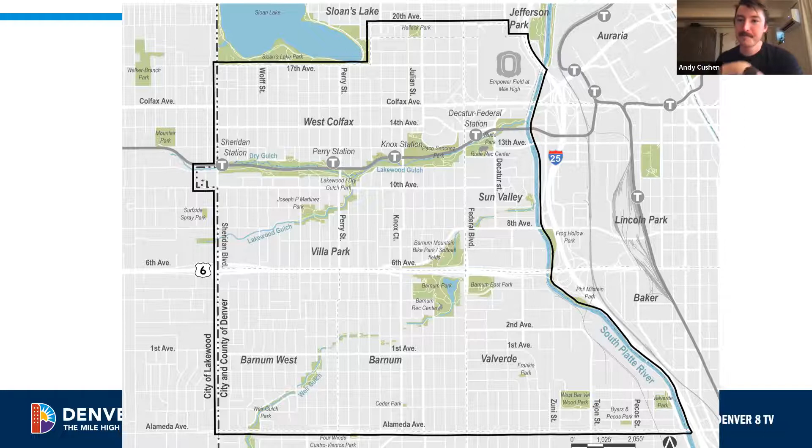Of course, certain projects the city knows that we don't, but is it just easier to put stuff like that in the chat? That's great, sure, yeah definitely. Any neighborhood efforts or things that we maybe aren't on top of, that's fabulous, that would be great.

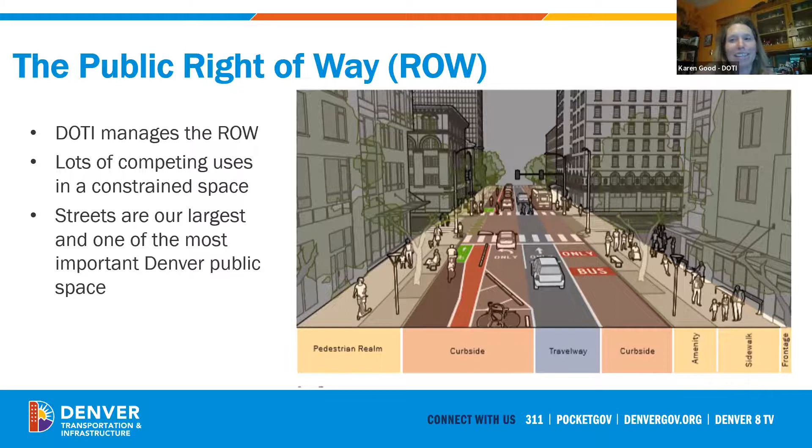I believe our next slide talks a little bit about overall right of way. I'm holding out for the next slide - it talks about how many people are willing and interested in biking but not really comfortable. That's 75% of people who would potentially ride a bike if they felt more comfortable.

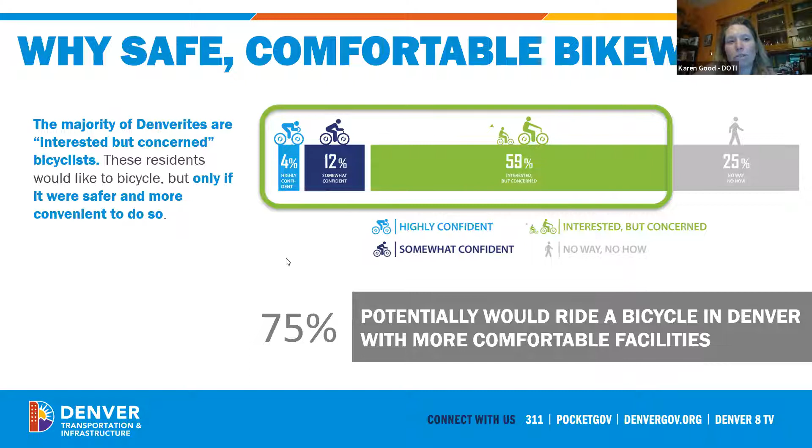Next slide, Beth. We look at opportunities to build on our past planning efforts, including Denver Moves Bikes, Denveright. We're doing all sorts of good things.

One of the ways we try to be efficient in building out our multimodal network is doing some of that build out with existing projects that we have.

The city does a lot of lane miles each summer in paving season, 400 to 500 miles. So we look at our paving map, based on things like condition of pavement. We look at what's planned to be paved in the next year, and identify areas that are part of the existing bike network, then take a deeper dive in seeing what we can do.

Do we replace the facility as is? Can we upgrade the facility? Is there anything else that we need to think about? Next slide.

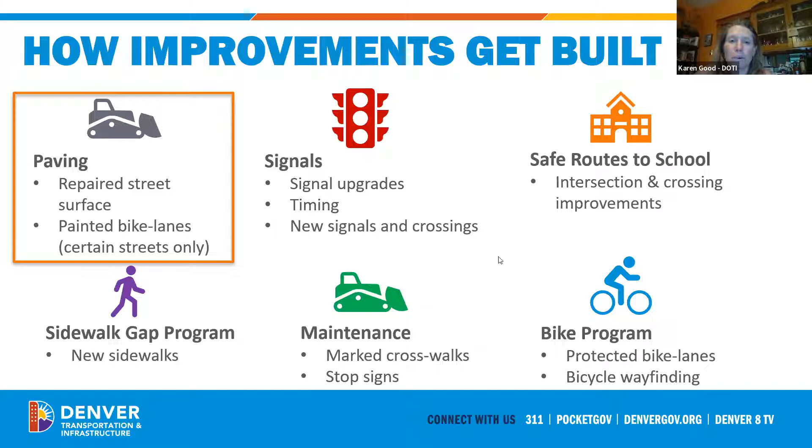We are also looking at other means of doing improvements, from our Safe Routes to School program to our Signal program, et cetera. Next slide.

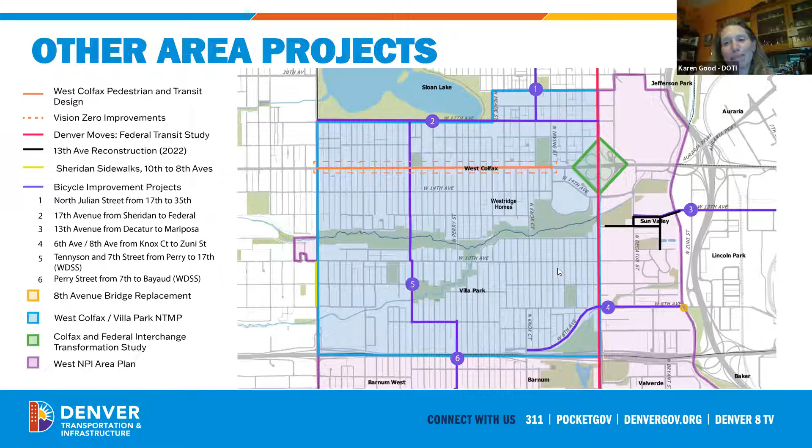We've talked about the other projects in this area. As we mentioned, we changed this from the West Colfax to the West area plan, but you all are pretty up to speed on some of the other projects in the area. We're going to try to zoom through and dive into 17th.

We are really at 100% design. So again, you're going to see some of the existing conditions, which I'm pretty sure you're familiar with. Our project area is from Federal to Sheridan on 17th. We've had lots of one-on-one meetings with folks in our office hours, as well as those pop-ups in the past couple months that I mentioned.

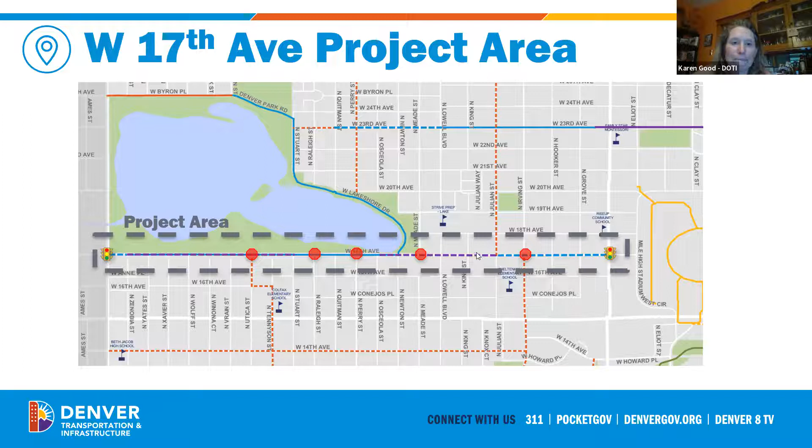So we've got a lot going on. As many of you are aware, as you go down or up 17th, there are really several different cross sections, from the west end that has the existing bike facility to the east end that currently has Sharrows.

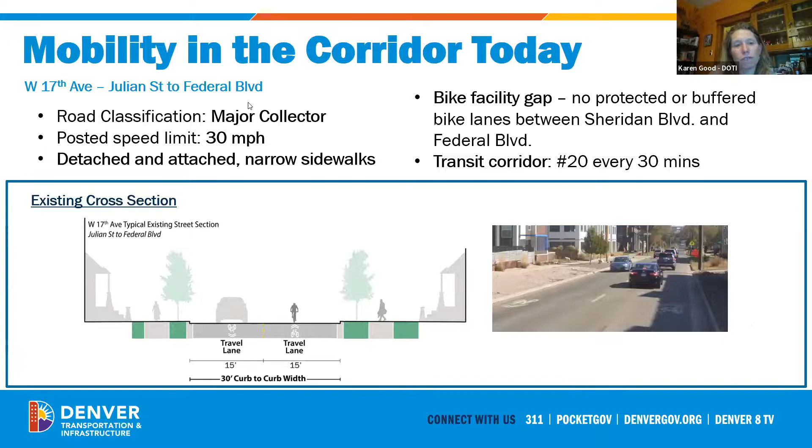So we look at all of that. Going to Julian, that's where we have no protection, we have those Sharrows and parking. And then in the final section, Julian to Federal, we have Sharrows and no parking. So it's a fairly short segment, but 3 different cross sections within that.

And that leads to some different cross sections of what we can do. We're making data-based decisions, so we look at the speeds, the volumes, and the crashes. The big summary is that the west end has higher volumes, the east end has lower volumes, and that speaks to what type of facility we'll have.

I believe we've got a little bit of a description and chart on the next slide. Oh, no, go into the crashes. Sorry, this is all in my head.

So our next slide talks a little bit about parking. As you saw in our different cross sections, some areas have parking on one side of the street, some have no parking, some have parking on both sides. So for making changes to the bike network, that often involves trade-offs with parking, so we wanted to get a good feel for what the parking utilization is.

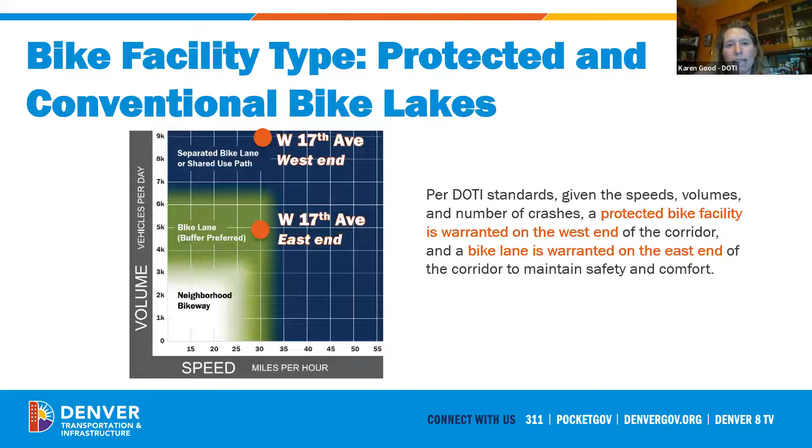And then I believe we are, yay, to what we're doing. So at the West End, with those higher volumes where a buffer is recommended, we are able to include a buffer. There is a trade-off—we do need to remove parking in order to provide that buffer, but it will look like 23rd in that section between Stuart and Sheridan.

And I'm pretty excited—we get to put some markings across Sheridan to guide folks across the street, and Edgewater will be planning some receiving facilities within the next year. Those will likely be Sharrows, the shared lane arrow that we currently have at the east end of 17th in Denver, but we're really excited about the opportunity—Edgewater has been a great partner.

They're working on some visualization and visioning for improving Sheridan. We were able to talk to them about the possibility of putting some connections to the Edgewater Marketplace and Edgewater Market. So they'll be doing Sharrows, fingers crossed, next year, up 17th to Depew, and then down Depew to Edgewater Market—getting you to the Edgewater Marketplace with King Soopers, Target, Ace, etc., and then to the open air market and Shake Shack. I think that's super exciting.

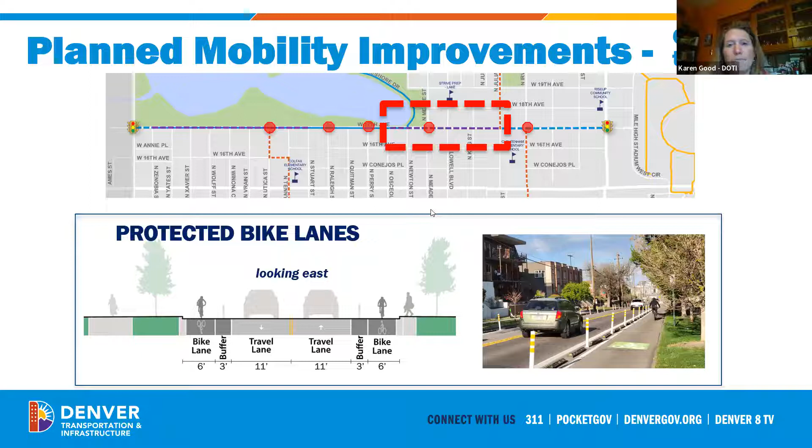That tucked in parking generally has bulb outs around it, so you still have a shorter crossing distance for pedestrians. Then we have a little segment of protected bike lanes, 2 travel lanes, going back to that protected bike lane style that we have at the West End, essentially between Julian and Osceola. Then we go back to our really constrained area where there's no parking already, so we can't remove parking.

This is a project being facilitated through our paving program. We're not doing a full rebuild of the street, we're not moving curb and gutter. We're just repaving the street and able to do these upgrades to our bike facility through the repaving program, so we will be tucking in a bike lane in each direction in place of those sharrows, the shared lane situation we have now.

So that's the big picture, and I'm going to pause for a second. We do also have bike improvements, including a little pedestrian median at Wolf. We'll be looking at green conflict markings, a new crosswalk at Newton, and a new stop sign at Julian, a four-way stop there. So this isn't just about bike improvements, but also pedestrian improvements.

So that's the big picture. I'm going to pause for a minute and then dive into our timelines a little bit. But does anyone have any questions?

Yeah, Karen, you said there was going to be a pedestrian refuge. Where was that again? Wolf, closer to the West End, so 1, 2, 3, 4 blocks in there. That has, as you can kind of see, the biggest gap between stop signs, and that's where we're going to do a ped refuge island and crossing facility there. There will not be a signal, but that's a separate project we're doing at the same-ish time, so you'll be seeing a lot of things happening there.

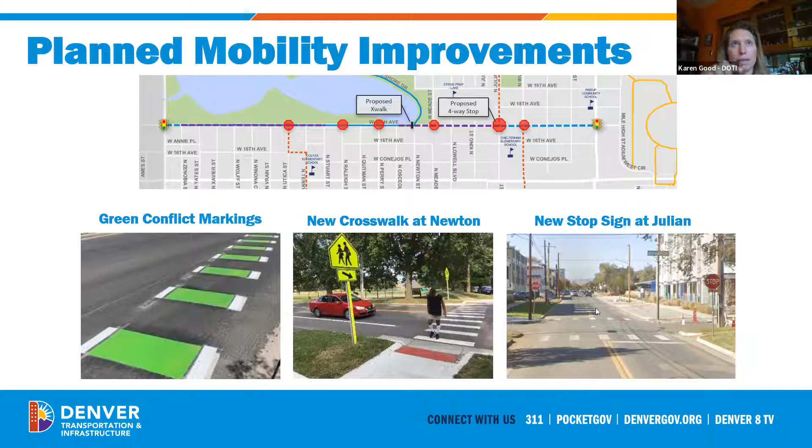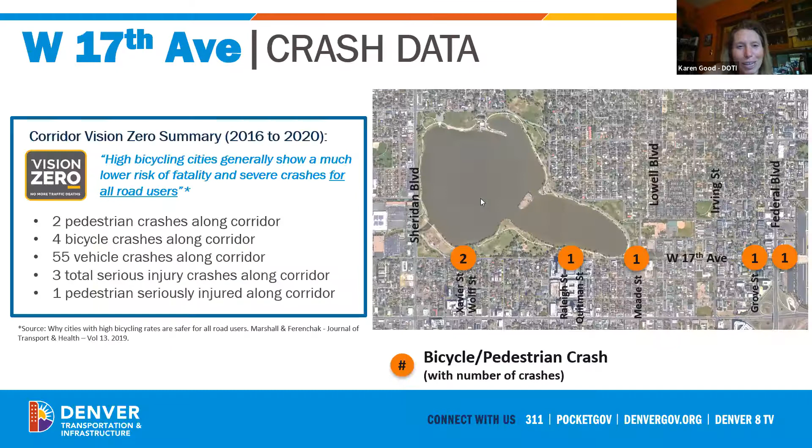If we could go back to the existing condition slide, Beth. Sorry, it's a bit of a hop. This one is not so bad. Okay, I'll go. And then I'm going to ask you to keep going, Karen, because we do want to give Lauren time as well.

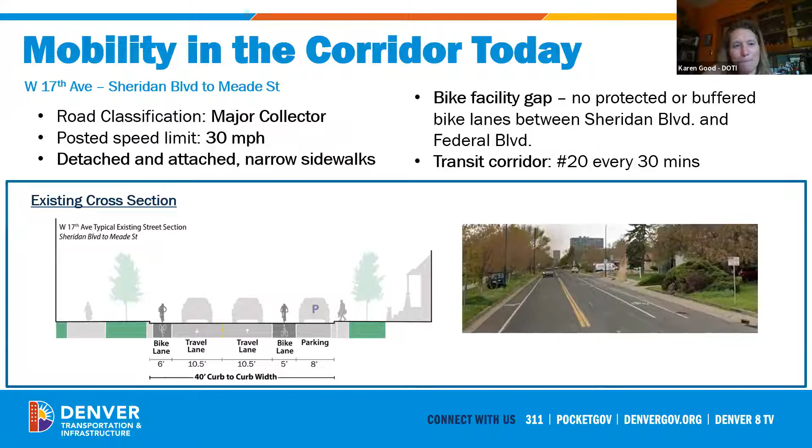So our existing cross-section at that Federal to Julian stretch, all we have are two travel lanes. There's no parking to remove. They're 15 feet wide each. So we go down to a 10-foot travel lane and a 5-foot bike lane. Part of that bike lane is really in that curb and gutter area, so we just don't have an inch extra.

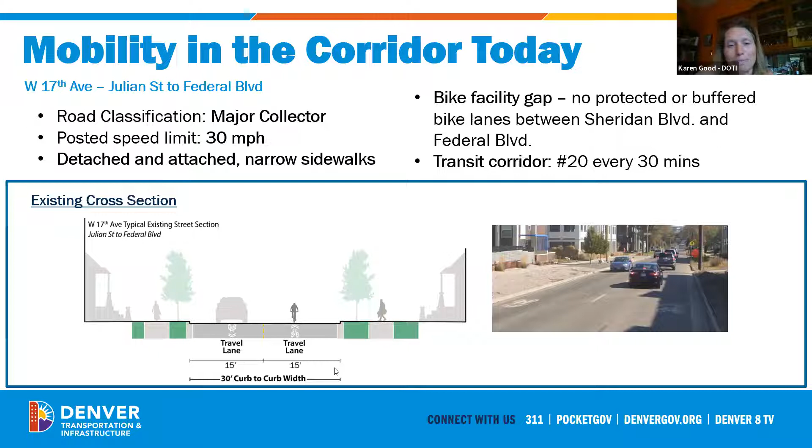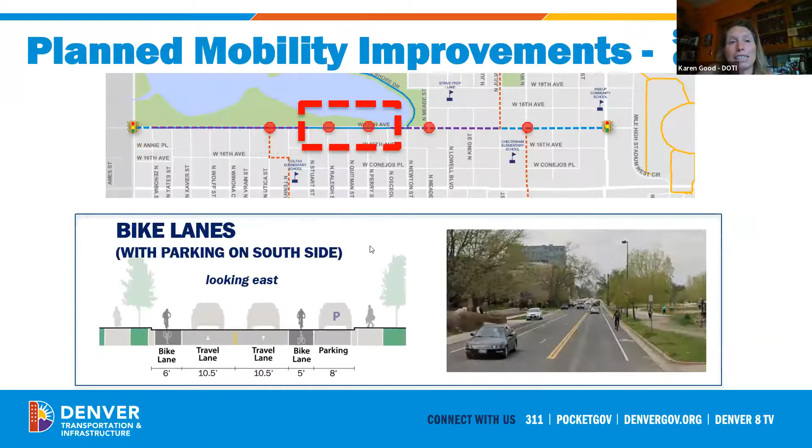So Beth, I'm just going to talk through our next steps, I don't really need the slides for those. Some of you may have seen, or may see next week, some initial work on curb ramps on the corridor. Then we're looking to start repaving right after the Dragon Boat Festival, Monday the 25th. Those operations will take a couple weeks depending on weather. And guess what, you don't go straight from paving to bike lanes installed. The whole project will take probably about 2 months.

So if you see the paving done and bike lanes aren't installed, I promise we did not forget, we know what we're planning to do. It's just different crews working on this all across the city. And if you see the bike lanes in without markings or buffers, again we didn't forget, we're not going back on our promise. It's just those materials, different crews, sometimes we wait for materials, and we're doing a lot of work across the city with some of the same contractors and project teams, so it will take a while. There are a couple different stages to getting that wrapped up. But the paving work and the bulk of the work will be complete prior to school opening.

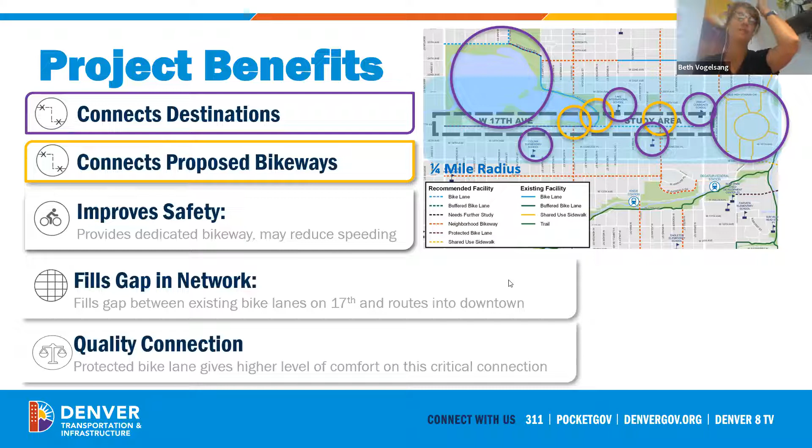Great, okay, so I don't see any more questions or hands. Karen, I'm just going to swing on through those slides. Your comments have informed this project. Yep, we've gotten a lot of feedback, many of the comments, I shared a lot of this.

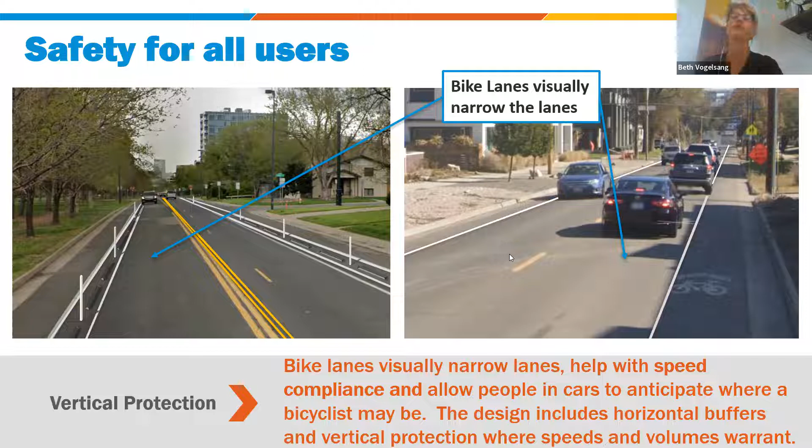This is a good one. It visually narrows the lanes to slow things up and give different cues. She's right, it should have a really big impact. And I did mention we're going to have markings across Sheridan, we'll also have markings across Federal. That design is finishing like this minute, so everything is happening now.

Great. Okay, stay involved, stay tuned, and on we go. Thanks so much, let's move us forward.

Thanks, Karen. All right, I want to introduce Lauren Winnen, she is the manager of the Stuart Street Storm Project. I know we want to get this one in this evening, so take it from there, Lauren. Thank you, Beth. Like Beth said, I'm with the city, I am the project manager for the Stuart Street Stormwater Project.

This is part of the Antero Peak General Storm package. What we do is package all our smaller storm system improvements into these bigger packages so we can put several projects out to bid and get better prices, including a bunch of different projects all together. So if you see it on the website, this will be listed under Antero Peak General Storm.

Just like Karen said, feel free to interrupt me if you have any questions, I'll look for waving or a hand up. So this is a new storm sewer system along Stuart Street from Colfax to Dry Gulch. It will intercept flows from an existing system at Colfax and then take them to an outfall in Dry Gulch.

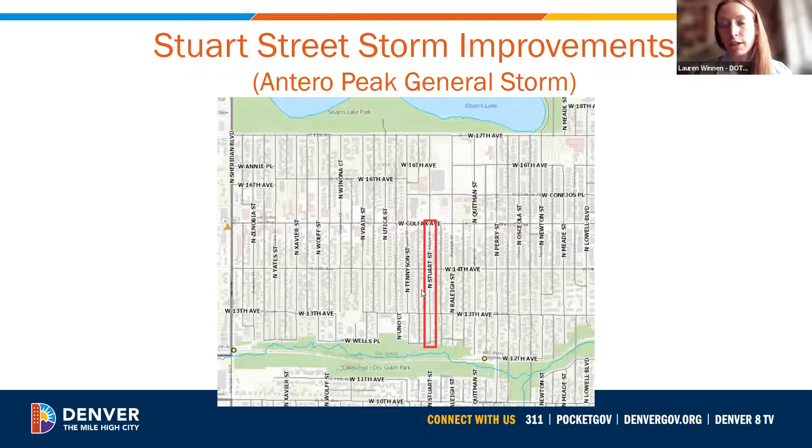You can go to the next slide. So this is kind of a blow up of what all is involved in the project.

Starting on the south end at the Gulch, there will be some water quality enhancements, and those will just look like some open channel swales along either side of Stuart Street, just south of Wells. There'll be an outfall to the Gulch, a 48-inch pipe, so it's pretty big. There'll be new manholes and inlets in the street.

This will all be underground, so you won't see anything in Stuart Street other than maybe some additional inlets on the sides of the road. As part of the project, we will be repaving the entire street. We'll be adding in a sidewalk for 2 houses that are missing one just north of 13th, to connect it, and we'll reestablish that curb and gutter.

And then there will be some work on the south side of Colfax. We'll be updating those curb ramps. Next slide.

So this shows the work on the south side of Colfax. These 2 pictures are the existing curb ramps, and we'll be adding in directional curb ramps, so they'll direct traffic across Colfax and also across Stuart.

You might be thinking that might be dangerous to cross Colfax right there without a light, but there's another project coming in after ours, the Colfax Ped and Transit project, that'll be adding in the median. So there will be a little refuge in the middle of Colfax that pedestrians can cross to. That's part of a separate project you guys have heard about before. Our project will be coming in first, but it's still a little up in the air exactly how timelines will align.

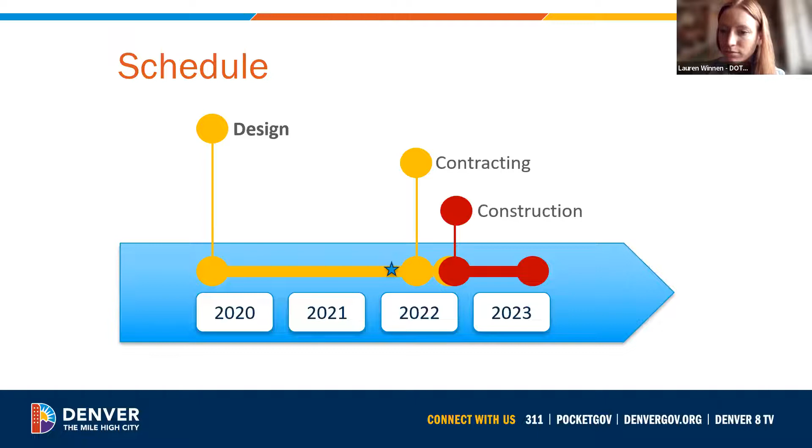Let's see, should we go to the next slide?

During construction, there will be a trail detour from Raleigh to Tennyson. It's nice we have those bridges at Raleigh and Tennyson, so that makes the detour pretty easy here. The contractor will work one block at a time, so if you live on or drive through Stuart, there will be just one block closed at a time. Work on Colfax will require some lane closures. All work will be done within the existing right of way. There will be some impact to landscaping in the right of way, driveway aprons, things like that—right along the road, since we'll be replacing curb and gutter and adding inlets. But all of that will be replaced in kind, and the contractor will work with homeowners to do so. Business access on Colfax will be maintained.

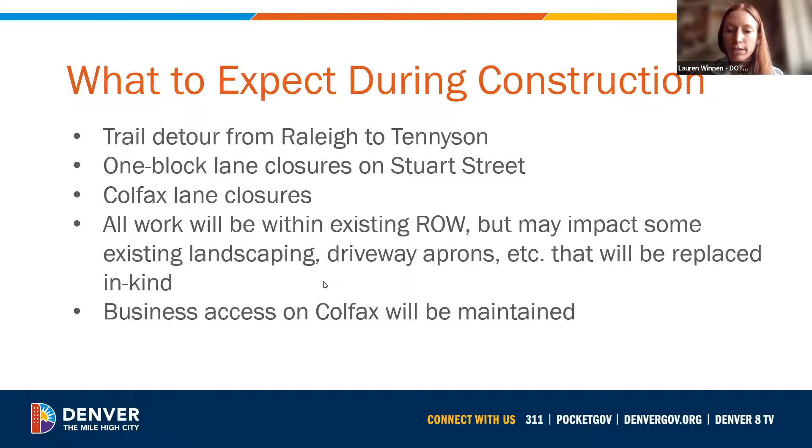Next slide, this is just contact info. I'm the design project manager with the city. Jacobs was our designer, their contact info is here as well. During construction, we've got a construction project manager, Paul, and the inspector is Gary, who is out on site all the time. If you live on Stuart and need access or need through, he would be the one to contact.

But again, construction's still a ways out and we don't have an exact schedule. We'll be coming out to you again before construction starts with that schedule, once we know who the contractor is and have their contact info. So just stay tuned. Any other questions?

Could I ask a question about the trail closure and how the block-by-block closures interact? Perry Street Station is my closest light rail station, and I go pretty often. Most of the time I just walk down to the trail and along it. It's not hard to imagine walking along 13th until I get to Raleigh and diving down there since there's access to the trail. But would there be a moment when they're doing reconstruction between 14th and 13th and the trail is also closed down? Then you'd have to take a big jog around on Colfax, which I never like to walk along just to get to Perry Street Station. I'm asking how closing the trail and the block-by-block closures interact.

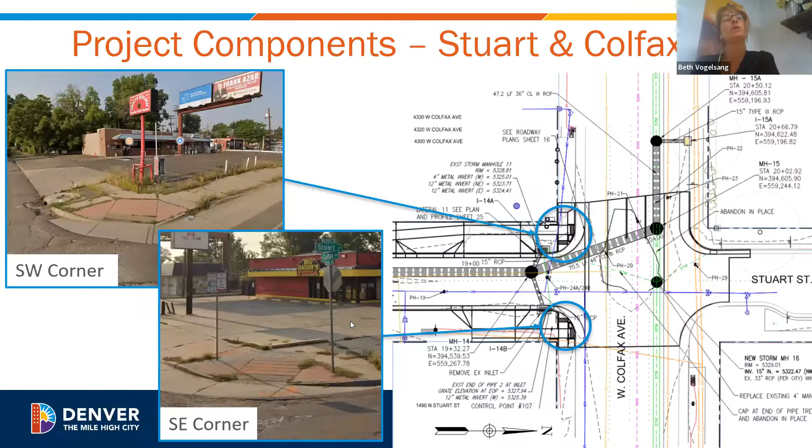I'm just going to flip us forward, and I think that is everything. I did have a quick question for you, Lauren—this is Eugene. You might have said this and I apologize if I missed it: the Stuart Street project, roughly how long do you think that project might last from when it starts to when it finishes? We have—I think the contractor's limit is a year.